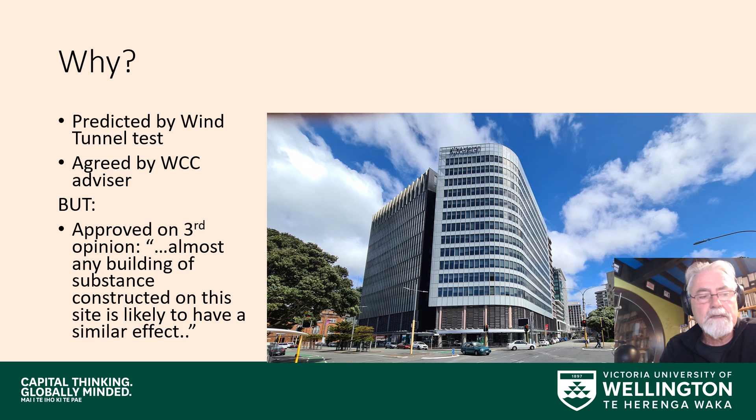The height limit is a crude urban design tool intended to reduce adverse effects on the local environment, such as shade, wind, need for resources such as drains and so forth. Unfortunately, following this crude rule of thumb and not the detailed wind analysis leaves us with a problem for at least the next 50 years.

He is demonstrating that conventional physiology-based indices of external comfort that combine the obvious measures of wind, sun, and temperature are unreliable indicators of people's preferences in the real world. These indices of comfort appear sophisticated, but are little better than rules of thumb because they ignore people's preferences and behavior. The issue of performance indices and what people want arises also when we look at light.

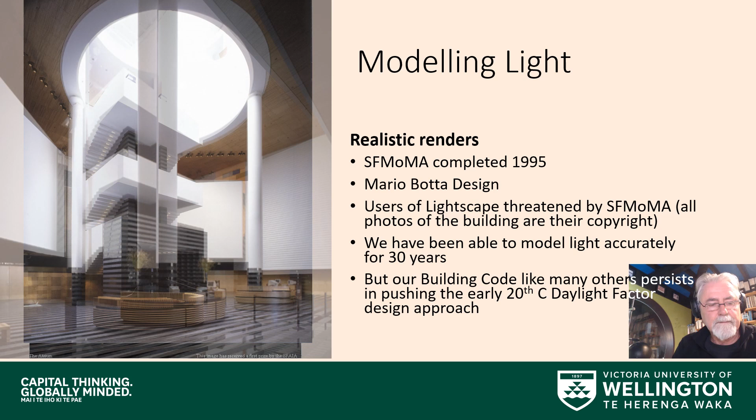These early 1990s images on the left are of the Museum of Modern Art in San Francisco. Only the last of the three pictures, the one with the trees in it, is of reality. The other two are renders. Clearly, we've been able to model light like this accurately and to represent what a building could look like accurately for over 30 years.

Instead, we have very crude measures of things like daylight factor for code compliance and for use in design. One result is people suffer in their apartments. Krystle Stewart's work 12 years ago measured daylight in apartments and demonstrated 50% of them didn't comply with the minimum 30 lux on the floor at the rear of the living spaces as required by the building code. We can do better. No one has asked, is this what apartment dwellers want?

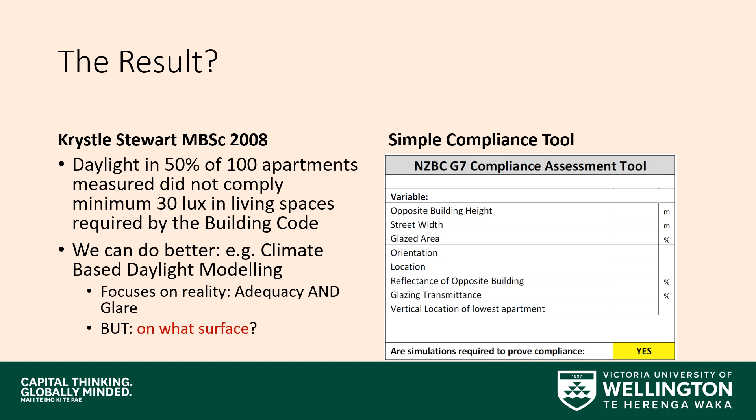Krystle used climate-based daylight modeling to develop a simple compliance tool which would use a few simple site-relevant measures to identify the risks of non-compliance with the building code. We've had her risk-checking tool available online for the past 2.5 years. The plan is not to avoid detailed analysis, but to ensure it's only done when needed.

I do, however, need to point out that current guides as to how to do climate-based daylight modeling typically focus on office daylight. That is illumination on a desktop, not something that relates to how people live in buildings.

Akli Anibi Tabasi has been looking at the broad issue of indoor environmental quality in school classrooms. In his work, we've noticed that while there are minimum standards for temperature and light, in acoustics there is the simplistic rule of thumb measurement of the reverberation time and a maximum intrusion of background noise.

Earlier work by Sarah Leggett has shown understanding noise in classrooms is not a simple rule of thumb issue. She looked at 10 case study classrooms, choosing multi-teacher and single-teacher classrooms, as you can see from the first two columns on the left. Apart from the number of students, the biggest single difference between classrooms turned out to be the carpet, with or without soft underlay.

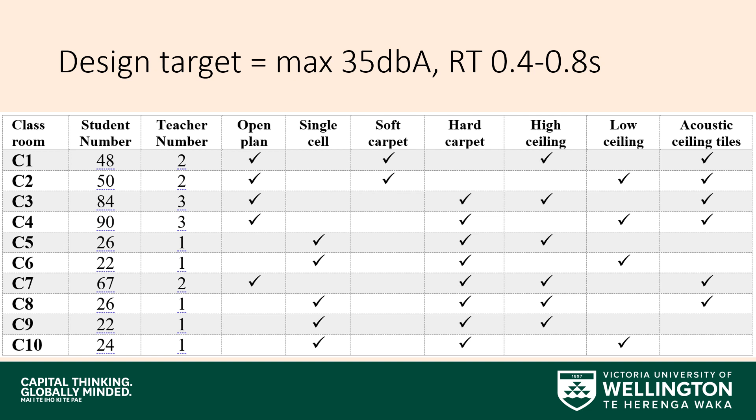Sarah undertook an ingenious process of asking the students themselves to assess the acoustics of their classrooms. She had them mark up plans from where it was noisy or quiet, and in this case where it was hard to hear the teacher's instructions. And then she overlaid them to get a frequency chart, as is highlighted here. At first glance, this is a clear win for the cellular single teacher classroom at the bottom.

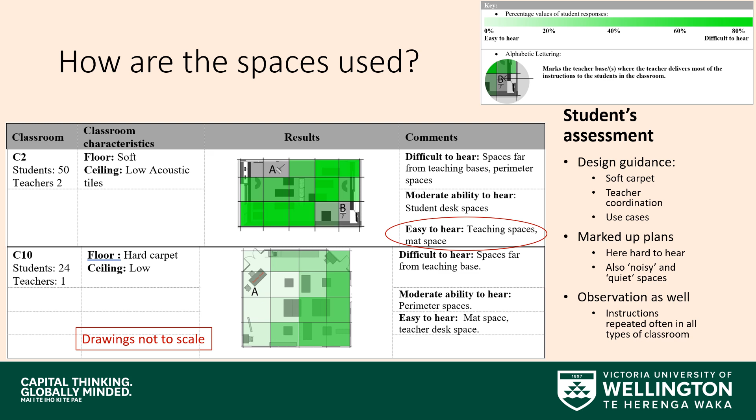But if instead of looking at the two-teacher classroom at the top, we look at another two-teacher classroom of the same size in the same school, then the result is much more similar between the types of classrooms. Rather than rules of thumb about reverberation times and sound levels, what turned out to be the most important lesson for us about acoustics in classrooms was Sarah's observations. This is from Sarah's notes in one of those two-teacher classrooms.

If I go back to my beginnings as a researcher in building science, I was involved in a survey with George Baird, looking at energy use patterns in commercial buildings in Wellington, surveying 1,000 buildings in the central business district. We reported this, as I recall, in a 1981 architecture science conference. We measured the model on the right-hand side here because LiDAR and other data wasn't available at the time.

We obtained dimensions of the building, the volume, the floor area, the percentage of glazing, and the nature of the opaque skin. This was much easier than walking around the streets trying to estimate these values. We also obtained every single oil, gas, and electricity bill for every single commercial premise in the city. What we found, to our initial surprise, was that physical parameters were less important than what people were doing in the building.

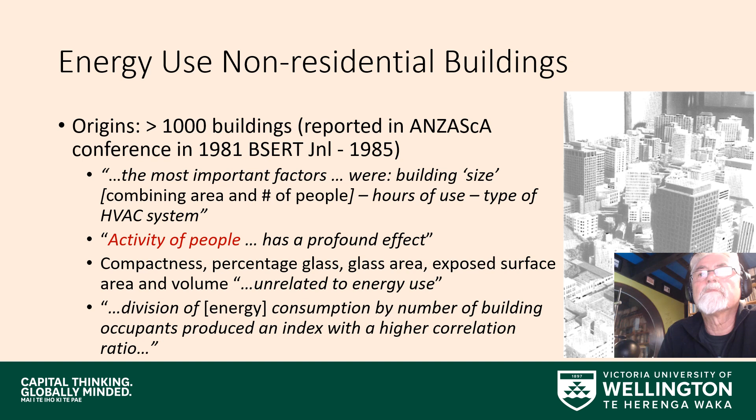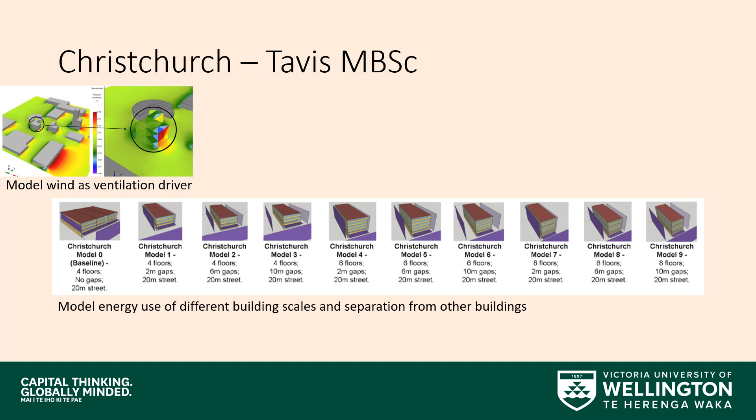Many years later, with the assistance of BRANZ, we again studied commercial buildings. This is Tavis Criswell-World's study of optimum building form in post-earthquake Christchurch. Tavis modelled the wind pressures that drive ventilation in a range of different proportions of building form, mostly focused on the scale of laneway beside the buildings that would let in light and air.

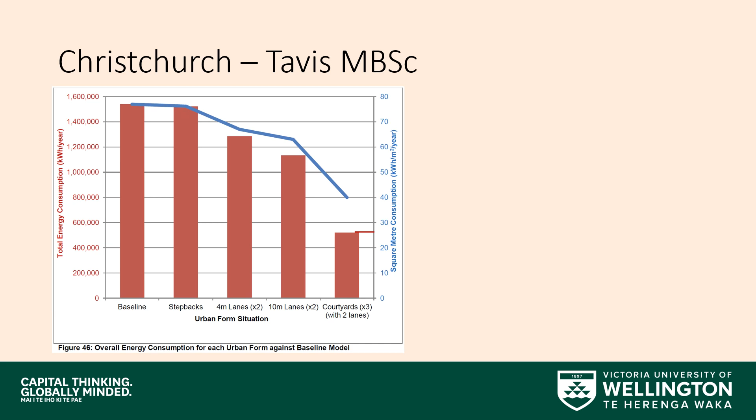The exercise established that laneways could improve energy performance by improving the ability to get daylight and fresh air through those openable windows. If you followed the central Paris courtyard model, you could increase that energy performance even more at the cost of some net lettable area.

However, the most important part of this study wasn't the energy use, it was looking at what it's like to be in the buildings. We demonstrated that there were real opportunities, even with a relatively narrow laneway, to get a very good distribution of daylight across the floor plate, as the near 100% daylight availability for two of the design options in the left graph demonstrates.

We also showed that some designs of office buildings would almost always reach a comfortable temperature without any heating, ventilating, or air conditioning whatsoever, as shown in the right-hand side graph by the large green parts of the bars measuring the proportion of the year in a comfort zone. You, of course, needed to operate the operable windows to control the indoor temperature.

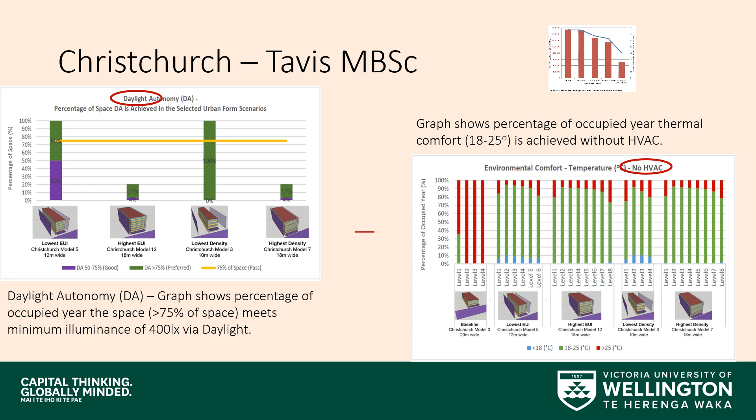Shaan Cory, a PhD student, took a very different approach. He looked at this range of energy strategies in all the commercial buildings in the country, that is the existing commercial buildings. Unlike standard exercises of this type, instead of looking at some kind of prototypical building, he looked at real buildings whose energy performance data had been collected by the BRANZ BEES study.

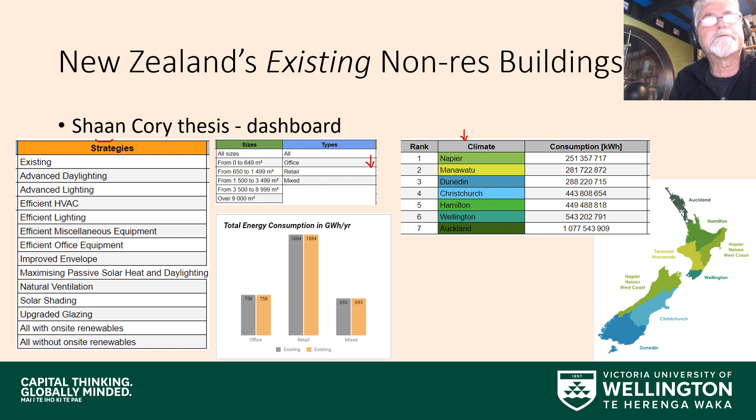He calibrated his buildings against this measured data, and then he applied each of these strategies in turn. So it started off with a breakdown of the total energy use in office, retail, and mixed buildings across the country and by region. And he was able to show, if you applied one of these strategies, how much energy you would save. Not a lot.

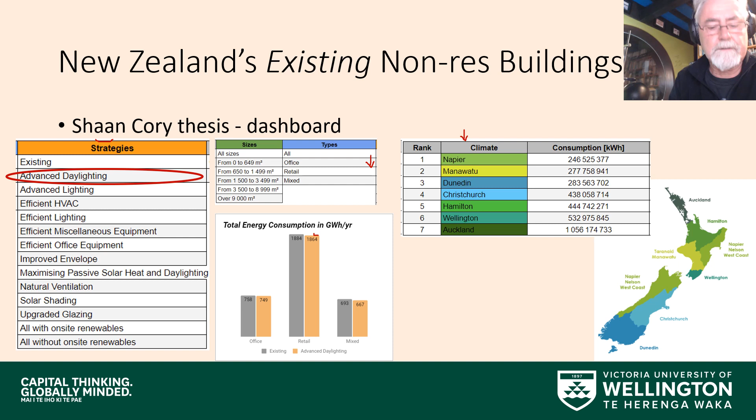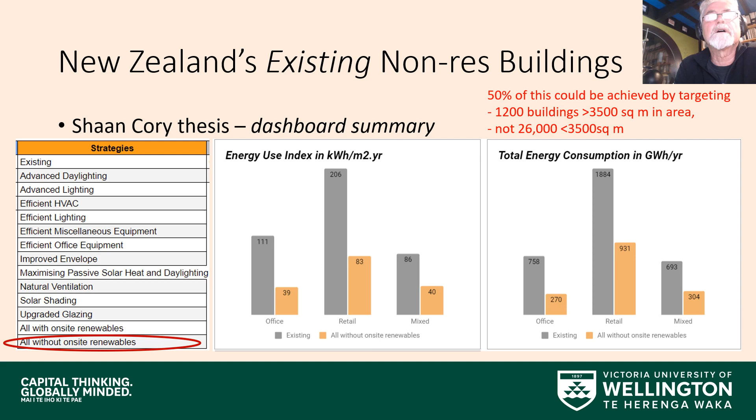But if we applied all the energy conservation measures together, we could get a significant reduction. Even better, we only need to apply this reduction to a tiny fraction, 1,200 of the nearly 30,000 commercial, office and retail buildings in the country, in order to get at least 50% of these targeted energy savings.

If we go back to our 1981 paper referenced earlier, when you run computer models of buildings, the performance is not normally as variable from one building to the next as happens in reality, because you're not modeling how people actually use the buildings. So the Christchurch buildings were very much prototypical.

Shaan's study of the commercial buildings in New Zealand was very much based on actual energy use in buildings, so we got a variability in the sample, but not variability of each building moved from one location to another. We took that sample and multiplied it up. So the most important parameter we're not modeling or recognizing is that different users manage the use of buildings in very different ways.

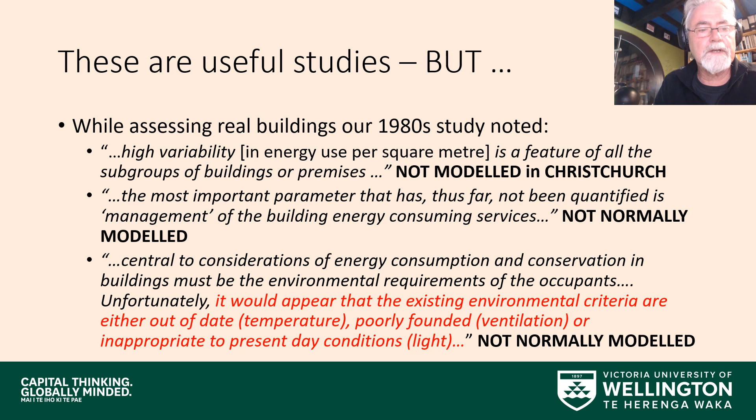Just as a footnote to this, I should add another irony. In that 1981 ANZAAS paper, we also lamented the inadequacy of performance criteria and indices. I believe 30 years later, that lament remains valid.

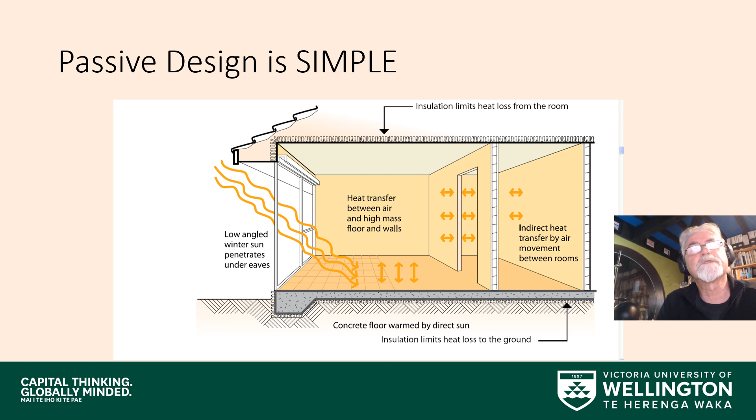Back in 1990, I was keen to promote the then fashionable concepts of passive solar. In 1990, I wrote, with the help of another graduate student, a passive solar design and passive solar construction guide. Much of that early work in the field focused on Trombe walls and some artificial differentiation between so-called active and passive. I'm sure this diagram doesn't need explanation to anybody.

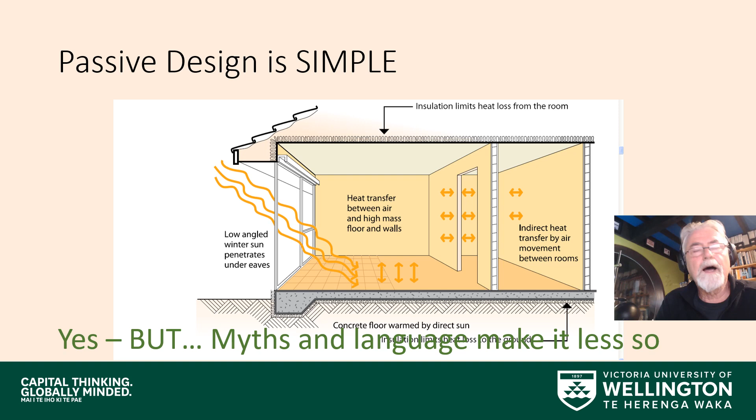The focus was on how energy might be saved. Problem was, we face a bunch of presumptions about how the world works in terms of mass, insulation, and glass.

In between 2001 and 2010, we also wrote a guide to good practice with the Standards Association. We had some argy-bargy with the people who are trying to defend the role of mass in the thermal performance of buildings, and we're worried that our best practice might set the guidelines for what would happen next in the building code. Eventually, we only wrote this document about lightweight timber buildings, not about concrete ones.

However, I suggest we should revisit this approach and should consider the philosophy of listing a guide with better and best practice building design features again today. They could, as happened prior to the 2009 change in the thermal performance specification, signal the next step change in the building code insulation minimum. They could even, in a different context, point to a daylight design best practice.

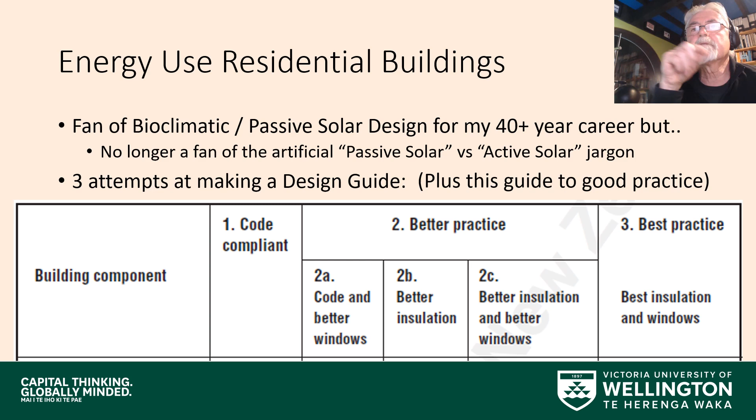Meanwhile, market leaders could use this prescriptive standard in specifying the performance of their buildings to builders and clients very simply by reference to this document. In a study of thermal bridging and modeling for BRANZ, we found typical code calculation specified proportions of timber in walls were half the real amount of timber.

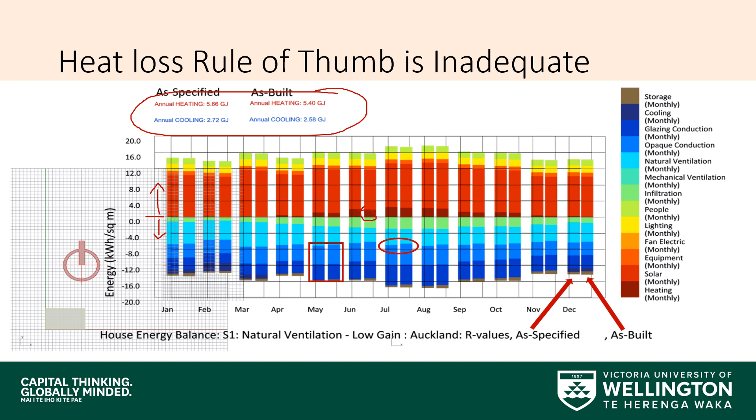The reality in the detail in this circle is suggesting it's how we're operating the windows, the behavior of the people, that is making the difference.

It would be remiss of me at this point not to highlight the dilemma documented by Lauren Christie talking to consumers back in the early 2000s about their house purchase decisions. She identified a serious issue about the disconnect between homeowners' desire to act sustainably and their actions. Homeowners understood the value to them of the energy efficiency or low carbon options they had, but would not choose them unless everyone else did so.

To this market perversity, I would add Germán Molina's research, where it is becoming clear house buyers are looking for very different comfort performance than designers typically intend, and they also don't trust vendors or vendors' agents at all.

What I've learned from this and the other studies is that detailed performance pictures are far more important than simplistic calculations. Even improved monthly heat balance calculators like PHPP or ALF, which allow for solar gains as well as heat losses and thermal bridges, do not help look at anything other than energy.

Convention suggests designers want simplistic rule of thumb calculations because they make the design decisions made in the early hours and days of a design concept easily. Clearly, these rules of thumb mislead. These research efforts lead to the types of lessons listed here.